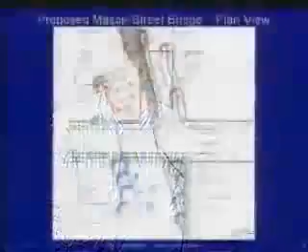We have evaluated this, and there's been some discussion regarding one-way traffic in an attempt to minimize the width of the street. We've looked at that extensively. Keep in mind the existing width of Kimberly, and through the remaining loop of this area, is approximately 34 feet. The road width around Chapala is approximately 34 feet. So this is just a bottleneck, a necking down of a roadway to a minimum that staff can support, and staff can support a 26-foot wide road here.

Some have commented that if you make it a one-way street, you could get down to 20 feet, a difference of 6 feet from what we're talking about. That 6 feet would not be enough space to add the level of protection to the tree necessary to protect it, in accordance with the arborist reports we've had. So we've determined this road needs to be 26 feet to not preclude two-way flow. We're not saying it's not possible to do one-way. It certainly is possible, but that is not this project.

This project is accommodating the traffic needs for this project and what we believe will be the traffic needs for future projects, as this bridge is intended to be here for possibly hundreds of years. Current bridges we are replacing have lasted approximately 100 years, and these will be seismically upgraded to last, we hope, at least that long, if not longer. So we have some tough decisions, as I've mentioned before, balancing the needs of the project and the needs of the stakeholders and the issues at hand.

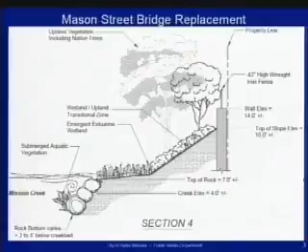So with that, I'd like to move forward and show you. There's a committee member that may need to leave soon, so I'm going to try and move it along.

This is a section you have seen through the habitat expansion zone, and it has the features that have been determined to be desirable, which is the emergent wetland, the slope that would survive with the vegetation proposed, and it's an opportunity for the animals and the vegetation to thrive.

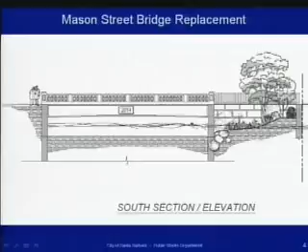This is a new section that looks as if you were in a kayak in the creek. You could look at this section, which shows the habitat expansion zone on the right. There would be a wall adjacent to the bridge that would be necessary to uphold the road adjacent to that, but that's what that would look like.

Now I'd like to show you the sections on the north through the Kimberly Road area, and there's been discussion about maximizing the slope to the north. Obviously we don't have the space here on the north side that we do have on the south side to have that terraced slope that is desirable at the habitat expansion zone to the south.

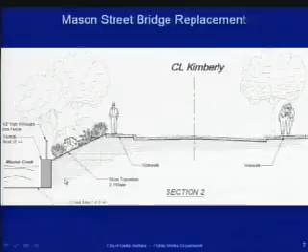This is a little further north where we're transitioning from that manhole area to lowering the creek wall. There's a transition made between the proposed sidewalk on Kimberly, a 2-to-1 slope, and that gets us to a wall height in this location of approximately 10 feet. The maximum wall height, by the way, was about 14 feet adjacent to the bridge. Then we transition right to where there's no wall as part of the design.

In previous discussions, there was discussion about this existing gabion wall that currently exists in the field, where our project doesn't get to that point. So we need to have a transition between the proposed vertical wall and the existing gabion wall, and this is a section of what that would look like. It would have a slope, and we'd likely have a fence in here somewhere to prevent people from getting into the creek.

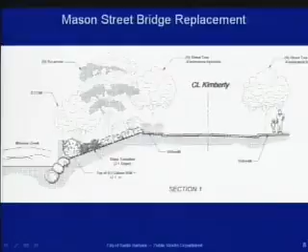It's a 2-to-1 slope that goes right from the back of the sidewalk down to near water level at the creek. This is a look at that, if you were in a kayak in Mission Creek looking through this right-hand side, which would be the habitat expansion zone to the south of the bridge.

Now, this habitat expansion zone in the future will emulate this habitat expansion zone. It'll be slightly smaller, but very similar. And in a way that we can start this habitat expansion zone similar to how we've started this one, this wall height has to come down.

So that's why this location of the manhole was determined to be preferable to a location upstream, as previously we were asked to explore. So we factored in what we believe is the best current and future design for this project.

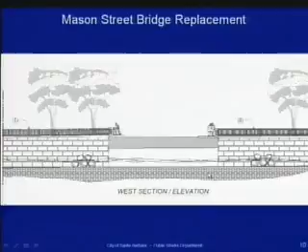So this is the opposite side. If we flipped or turned our kayak 180 degrees and looked on the west section, it's wall because we don't have property acquisition on that side of the project. Downstream we'd have the Roma-Sana property, and upstream we have 20 West Mason, which is the blue house in the opening photo, which the city will be acquiring but protecting in place.

So with that, I have provided a list of the HLC, the Historic Landmarks Commission motions from the last 2 meetings as a handout. And on the back of that, there is a summary of what I believe or understood to be the comments and recommendations from the Creeks Advisory Committee.

So with that, I'll take any questions. We go back to HLC 2 weeks from today on February 29th for a preliminary approval. Again, the critical component of this is that we need to have the western abutment alignment and the geometry of the bridge established so that we can move forward with the next step in the design process.

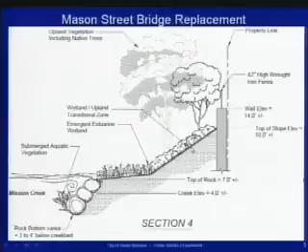Mr. Moldaver, did you have a comment?

Madam Chair, I wanted to clarify something on what I understood as the committee's request to consider narrowing Kimberly Street. I think that specific request was linked not to the sycamore tree on the downstream side of the bridge, but to opening up the possibility of a sloped bank on the upstream side of the bridge near Kimberly Avenue, instead of having the vertical wall up there. If the road were narrowed or moved off the creek a little bit, it would allow for a sloped bank there. So I think that issue is getting confused. That was the focus, I think, of the committee's comment.

Mr. Moldaver? Thank you, Madam Chair. First of all, since she had to leave, I want to extol again the excellent work that Ms. French has done representing our committee before the HLC in multiple meetings. She's been a terrific ambassador. And I want to thank Mr. Wozniak for his fifth presentation. In jazz, some people, as they sing the same song over time, vary the lyrics a little bit, but I think your phrasing, sticking with the original language of your department's proposal over and over, is very impressive. And finally, I was really, really impressed that the property owners at the corner of Kimberly, who are so famous for being reclusive and introverted, as well as for their altruism and civic philanthropy, that you were able to get them to discuss the road width and their future development plans with you. I mean, they're right up there with Emily Dickinson—they don't share their ambitions with many people.

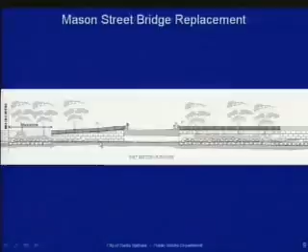And we're trying to minimize the height of the wall by reducing it down as low as feasible to transition to rock, which then has to tie into the existing gabion walls that exist there, beyond this project limits. So I feel like we're doing what we can. I'd certainly appreciate any comments or suggestions of how we could do this better. I just don't know how.

The point of the clarification was the idea that if Kimberly were narrowed or moved to the east, or the sidewalk on the creek side were removed, that would give you the space to have a sloped bank. And it's the width of Kimberly, the proximity to the creek, the sidewalk that creates the constraint that requires the vertical wall.

We've heard the explanation of and the determination of the width of Kimberly and the location and the competing interests there. I was just making the clarification that it wasn't related to the tree and the abutment on the west bank, on the downstream side, but rather the slope and to allow for the possibility of a slope bank on the upstream side, right up there.

Madam Chair, in response to that, the way that we get a sloped area here is to move this road significantly further to the east. And then we are into a real big discussion item with the developer on the take. So there's an expense involved there for the acquisition. And then there would be a lot of discussion about how much, if any, we can negotiate or take from that property to obtain a sufficient space to do a sloped terrace.

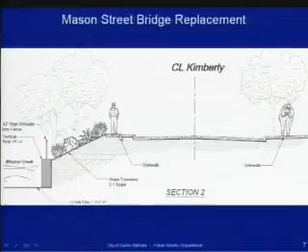My point in raising this issue on the creek side is that just beyond this project limit, I'll show it here. From this point on, there's an existing sidewalk all the way north down the stretch. So I'm questioning whether the intent is to stop the sidewalk here and not have a sidewalk on this side of the street, when we have an existing sidewalk all the way down the street on both sides beyond this project.

I agree completely, and I think your logic is flawless. If you can come up with a revised Kimberly plan that gets as much creek bank and habitat in the lower part of Kimberly as there is in the upper area going toward the hostel, that accommodates the sidewalk, I would certainly be willing to consider a sidewalk down there. But given how constrained the space is, I wouldn't want to put pedestrians at risk on a narrow sidewalk between traffic from a new development and a steep vertical wall on the other side. I think the city's risk manager would raise a red flag about that.

Slide back up, just to clarify: the existing condition does not have a sidewalk that runs the length of Kimberly on that west side. As Mr. Wozniak mentioned, about where that dotted line crosses the street, there's an existing sidewalk up there, and then there's no sidewalk on the creek bank all the way down to the bridge. So there is something of a sloped bank that is the existing condition there.

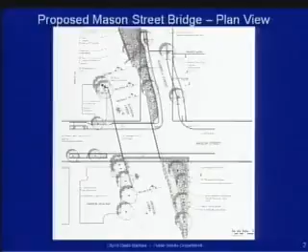I think we need to move forward and get some kind of motion here to have staff write up this letter for us, unless there are any final additions or changes to what he's read off to us.

Madam Chair, I would move that the committee convey a written statement to HLC and to the project applicant, the Public Works Department, enumerating the 8.5 issues of concern expressed by the staff, the half being Mr. Casevier's addition to the list that Mr. Benson read to us.

For a second, or second. All in favor? Aye. Any opposed?

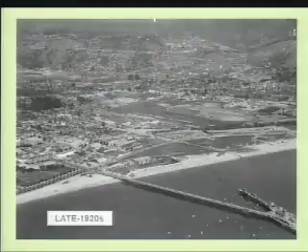But if you go from 1853, most people know the story that as Santa Barbara got built out, that wetland got filled in. A big event that contributed to that was the 1925 earthquake in Santa Barbara. They had a lot of rubble and a big open wetland to dump it into. And so they did that, and a lot of the wetland was lost, and a lot of the functions I just mentioned were lost, or at least greatly reduced.

This big oval here is a racetrack. You can see here there's a lumber yard actually on the beach. And this photo is interesting because it shows the spur on Stearns Wharf. That spur actually connected at one time to a railroad that connected with the main railroad line, went right across the estuary and what is now Laguna Channel.

Here you can see Mission Creek has been channelized to go back around the lumber yard and exit further to the east, and the estuary has basically been reduced to this small channel, and then assumedly got routed straight out to the Pacific.

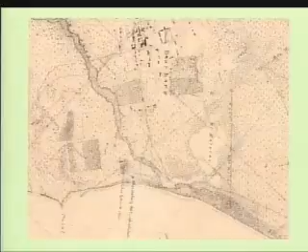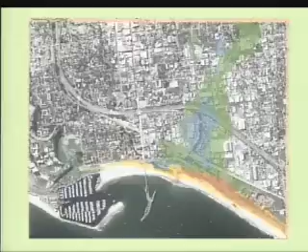Now, I want to be clear that this project is not proposing to restore the historic lagoon area, but really what we're looking at doing is taking advantage of the lagoon that is left on the beach and restoring some of those functions. So lagoons recharge groundwater, they restrict saltwater intrusion into our freshwater supplies, they mitigate the effects of urban runoff, they provide habitat, and so we're working with a much reduced footprint but trying to maximize those functions.

Now, there are several other projects that we need to be aware of that the city has in various stages of development and construction. I'll start with the Lower Mission Creek Flood Control Project, because the last agenda item dealt a lot with the channelization of Lower Mission Creek and the estuary there. A portion of that has already been built, and they've widened and deepened the estuary north of State Street, so it's about 50% bigger there, and primarily that was for flood control conveyance. The Cabrillo Bridge replacement is another project that's slated to happen, and this is Cabrillo Bridge at Mission Creek.

There's also an ongoing maintenance program called the Waterfront Sediment Management Plan, a joint project between the Army Corps of Engineers, the city's waterfront department, and Parks and Recreation. Essentially what they do is keep this channel free of sediment, basically sand in the longshore current that comes around the harbor and drops out, plugging it up. So this is an ongoing maintenance effort where they pump sand, dredge it out, and get it downshore where it can be picked up again by the longshore current.

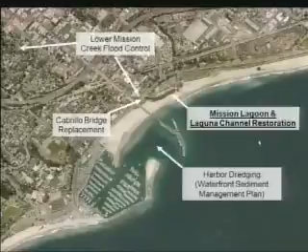And then, of course, here's the project that we're talking about. Each of these projects affects this project in various ways, and the two public works projects have required mitigation, environmental mitigation, and restoration to offset the impacts caused by construction. One of those mitigation areas is just downstream of the Cabrillo Bridge.

They're going to widen and deepen the lagoon here, and then increase the amount of native vegetation, basically doing some native plantings. This is a plan that's already been approved by the various city oversight committees and the Coastal Commission.

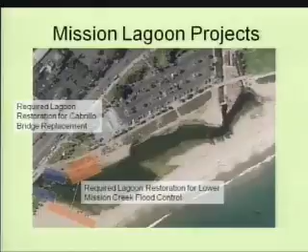This essentially extends that effort for the impacts associated with the Lower Mission Creek Flood Control Project. So these four colored areas are areas we're not proposing to change. It's already been set in the plans that have been approved.

The Waterfront Department every winter builds a large sand berm here, part of their permitted activities for the sediment management plan. The goal is to get Mission Creek to outlet further to the east. The problem with it coming out here is that during a big storm, it washes out and tends to erode the pilings of Stearns Wharf, and also deposits a lot of refuse and garbage into the harbor. Interestingly, when this action was permitted, it was permitted with the hope that it would create one lagoon by diverting Mission Creek to the east, which would benefit the endangered tidewater goby.

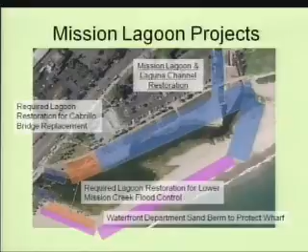The blue area is really our main design area that we're proposing for this project. It's basically picking up where others have left off on their designs and trying to meld those two together. So that's the main design area, but there are others that I'll talk about.

Let me summarize about Mission Lagoon. It is a dynamic environment, basically water on sand. There's no real hard structure that determines its footprint year in, year out, but there are forces that shape it, whether it be the longshore current, storm action from the ocean, or the amount of runoff we're getting from our mountains and valleys in large storm events.

We also need to be clear that Mission Lagoon is not disconnected from the estuary, which has typically been that section of Mission Creek north of Cabrillo Boulevard. They're the same water body, and that goes up to Chapala and Yanonali. For some reason, the area south of Cabrillo Boulevard has traditionally been called Mission Lagoon, but they are similar. You'll have tidewater gobies in both habitats, and southern steelhead migrating through both the lagoon and estuary. They are unique habitats because it's saltwater and freshwater mixing, and there's only a certain suite of species that can tolerate that potentially traumatic environment.

Two of those species are endangered, and part of the reason is that their habitat has been diminished by water quality issues and loss of areal extent. The water quality issues most obvious to folks in Santa Barbara are the smell and the algae, which are really caused by excess nutrients. We also have a lot of bacteria that gets into our waterway and eventually washes out into the ocean.

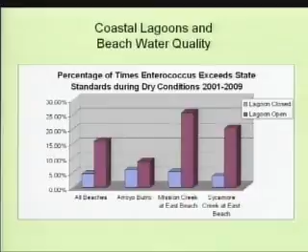So this obviously will focus our design efforts. How can we improve water quality both when the lagoon is closed and when it's open?

Here's the pipe that delivers sediment from the harbor down to the far end of East Beach. This happens roughly every other year or every three years, depending on how they structure their contract, and that area basically turns into a temporary construction zone. One of the efforts of the project is to design it so we don't need to disturb that habitat every three years.

Here's a great photo of community effort and attention to the lagoon. There are a lot of people in our community who care about this habitat and come spend a Saturday morning picking up garbage that washes from the upstream areas of Santa Barbara down to the beach.

There are other people that access the beach, and this is pretty much their access route. They run across the bike path, the multimodal path, come out onto the dunes, stand and take a photo, go down in the water, muck around, and look around. One of the design efforts here is how can we improve this access, and how can we improve the natural history story that can be told for this important part of the city?

This green vegetation in the foreground is non-native, called ice plant. Many of you are probably familiar with it. This is also important habitat, since there are California native plants specific to dune habitats that are being lost throughout the state, so this is an opportunity to restore those. Those native plants are similar in structure and height to ice plant, so you wouldn't lose those potential views.

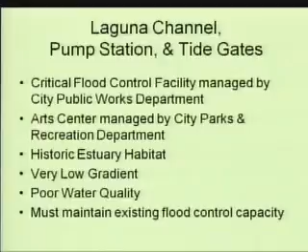First and foremost, though, on this portion of the project, we really need to maintain that existing flood control capacity, because it's critical for the residents and businesses housed and operating out of that lower eastern portion of Santa Barbara. Here's an aerial overview.

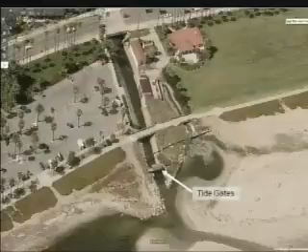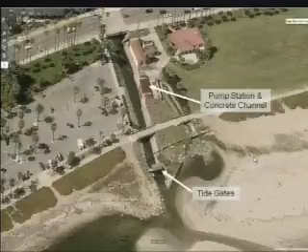The tide gates here basically restrict the influence of the estuary from going upstream in the channel, so there's a disconnect between this body of water and the lagoon. Here's the pump station, which sucks water up through a series of pumps and then ejects it out and around the tide gates. And here's the concrete channel and the discharge channel.

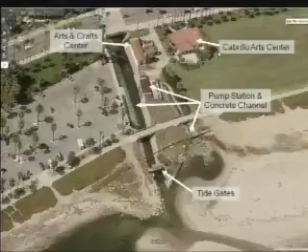Here's the Arts and Crafts Center built right on top of the bank, and here's the Cabrillo Arts Center. I just included this because it's not within the design footprint; we're not touching or looking at moving or doing anything with this building. Sorry, Chase Palm Park Center, I mislabeled that.

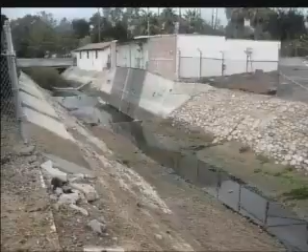Okay, here's a ground view of the Laguna Channel, the pump station in the mid-ground there, and this is the Arts and Crafts Center at the back. You can see both of these structures are built right on top of Laguna Channel. You can see the relatively poor habitat here, and this facility is in need of both repair and or replacement.

Here you can see the channel walls are degrading, mostly due to age and the ground squirrel population there. You can see some native vegetation here, this is California tule. And in the background, we've got a pretty decent riparian canopy with sycamores and oaks and various other large trees.

Now, I want to jump all the way over to the far western portion of the project. We're going to skip over the Lower Mission Creek flood control project because that's already been planned and there are designs being constructed right now for that, so we're not touching that.

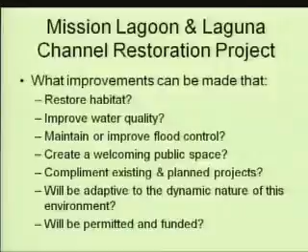And this is really the design process we're working with, laying out with our chosen consultant, ESA PWA. They're going to basically do three stages. The first stage is creating an existing conditions report, where they do a whole suite of technical studies that form the constraints and opportunities of the project area.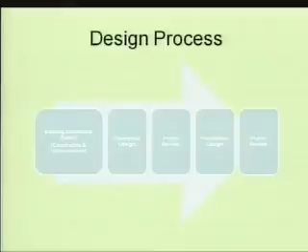From that constraint and opportunity analysis, they generate a conceptual design. By conceptual design, I mean, if a final design you can actually go out and construct is 100%, we're talking about the 10 to 15%, where you're not going down a path that's going to get shut down by some technical issue. You're really forming a very initial stage.

So we take that conceptual design, hold public review meetings, do a community forum. I'll probably be back here before the committee to explain what the conceptual design is all about. We take all of that input and put it into a preliminary design, as long as it meets those 8 project goals I mentioned in the beginning. And then again, we do the technical analysis, run the models again to make sure it works feasibly, technically, and then go out and do another public review.

So this contract that we're talking about will take us to about 35%, and then we stop and start up another design process in the future.

That first step is the front-end loaded effort where we're doing a lot of technical studies, wave run-up studies, hydraulic analysis, hydrodynamic modeling, and it's basically getting the answer of how does this system work and what can we design within the constraints and opportunities of this dynamic system.

There's also structural assessments that need to happen with the existing structures. What condition are they in? Do they need to be moved, repaired? Basically answering what is happening beneath the surface on these structures.

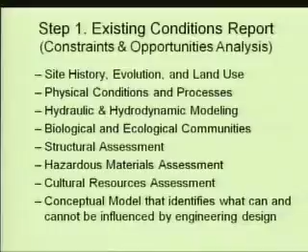So we can put all of those technical outputs into this conceptual model that can then generate an idea of what is actually possible and what can we answer with an engineering design and technically answer versus what is not possible.

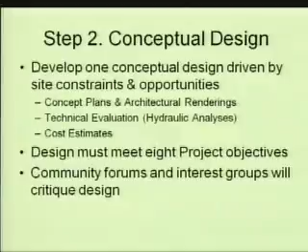So step 2 is then the conceptual design. We're going to develop one conceptual design driven by the site constraints and opportunities, and this will include concept plans and architectural renderings. We want to do both so that if you're a layperson that's never seen an engineering plan, we want to have a picture from a human's perspective looking out at the site and saying, this is what it might look like in the future based on this conceptual plan.

But we also have a whole lot of technical evaluation on the specific elements of that project so that we ensure that we meet those 8 project objectives. Then there will be a very preliminary cost estimate on whether this thing is going to be actually built anytime in our lifetimes. And of course underlining all of this are the community forums and public outreach to make sure that the members of the public and the community that value and cherish this area have input on the design. Then this third stage is the preliminary design.

We'll run through a refined conceptual design, run that through the engineering analysis again, and end up with those 35% plans, refine the cost estimates where we have more details that we can put in to find out what this thing is actually going to cost.

And then the consultant is going to basically do an implementation plan to say, if you're going to build this, what is the most logical way to build it? And then another round of public review and input.

So this is the breakdown of the consultant team. It's 7 different firms that have various specialties and expertise that we're taking advantage of. The principal consultant is ESA PWA, as I mentioned.

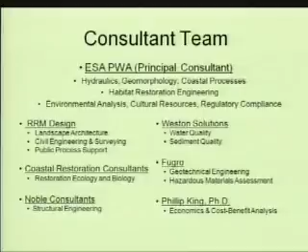And then Phil King is a professor up at San Francisco State, I believe, or University of San Francisco, and he'll do the economics and cost-benefit analysis of this project.

Basically what I'm doing now is working with all the other city staff that are involved, and asking them and going through our records saying what work has the city already done that we don't need to duplicate, so we can deduct that from the cost. There will be some costs associated with the consultant compiling that information and putting it into their model, but we don't need to rewrite the whole book essentially.

So that task 1 is the technical analysis and constraints analysis, $241,000. That's where the bulk of the hard work is, the engineering analysis and the biological studies and cultural studies and so forth.

$200,000 for a conceptual design and the proof of concept for them to run that concept through the engineering analysis again, and $200,000 for the preliminary design.

They've included a couple optional tasks: $33,000 for the regulatory compliance strategy, which is a document recommending how to best deal with the permits we'll need to get, and then the economic analysis, which tries to assign a dollar value to the habitats we're trying to create.

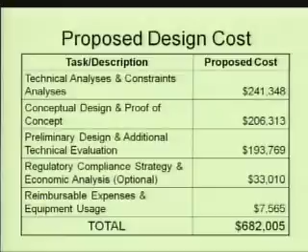So we're looking at about $680,000 as our starting point for negotiation, and we hope to get south of there. The range I've given the committee is $100,000 between $600,000 and $700,000, but we hope to end up closer to $600,000.

You have to remember working the public review process into that timeline as well, which I didn't include here. While that's happening, I'll be applying for any grants that are out there. Once we get the preliminary plan, we'll kick off the permitting and environmental review process, and then sometime in the future, we hope to get to the final design.

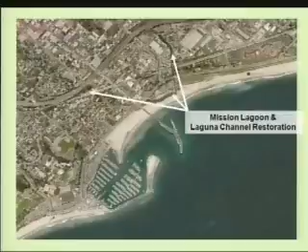My understanding is the wastewater folks in the city just went to council and got approved for an environmental consultant to do a restoration plan for that area, and I believe that happened last week or two weeks ago. So there is movement on it, and our intention now is to try to coordinate with those folks to make sure that whatever plans they have will meld with our restoration plan.

Excellent, thank you.